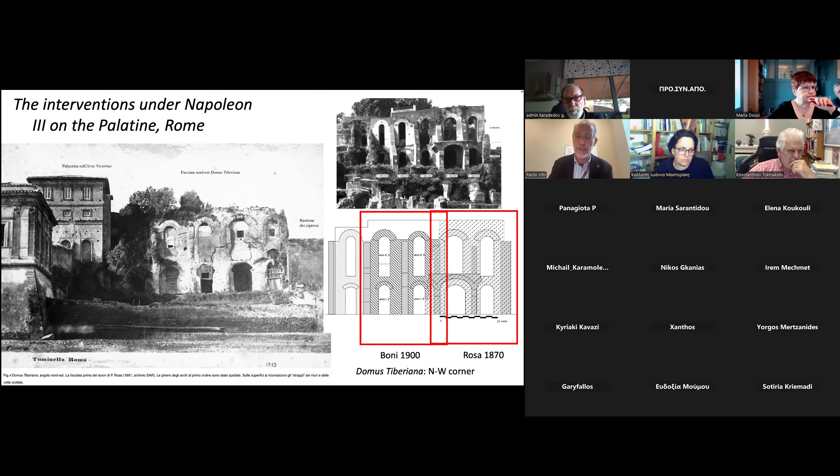This part, in 1860, was bought by Napoleon III, who conducted extensive archaeological research, which caused the condition you see in the image on the left. This is the layout you see today. You understand that the removal of soil caused some very important structural issues. For that reason, in two steps - the first in 1870 by the archaeologist Rosa, and the second by Giacomo Boni in 1900 - they addressed the need to structurally support this very impressive elevation, extremely high, which had structural issues because of the excavations.

The context of archaeological intervention is one you have studied: the principles of conservation established by Giuseppe Valadier, who in 1823-1826 conducted the famous intervention on the Colosseum, made eminently using the traditional building methods of the period. So if you look at the brickwork, you recognize it has nothing to do with the Roman brickwork. The main purpose, aesthetically, was to reestablish the idea of appropriate aesthetics, but through construction methods that were contemporary to the building culture of the time.

If we go look at the Domus Tiberiana and the details of the masonry used to reconstruct, you see these buttresses and vaults that support the facade. In red is this area, which originally corresponded to a barrel vault covering a room that had collapsed. This barrel vault is built through a very traditional brickwork called the Flemish bond - bricks placed like headers and stretchers, which has nothing to do with the section of a collapsed vault. So there is no intent to showcase any philological appropriateness in terms of aesthetics of the restoration corresponding to the aesthetics of the ruin or the construction methods of the Romans.

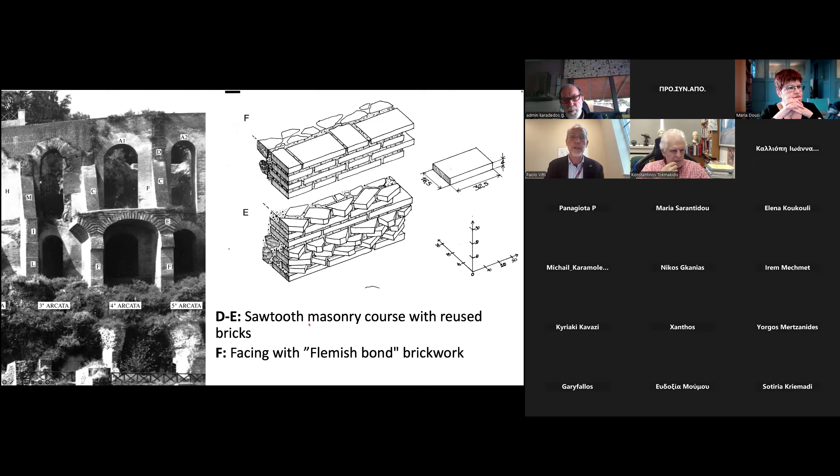This is translated into systems that use the bricks in two ways: one is the Flemish bond, as we discussed, and in some parts, like here, there is an attempt to show the incompleteness of the structure through the use of sawtooth masonry. All this is taken directly from contemporary construction methods. This is the Palace of Justice, a building under construction in the same period, and you see that the construction system is basically the same applied to an archaeological remain.

So we understand that by the 19th century, the appropriateness in intervention was basically to keep structural soundness by using the building methods of the period. But in the early 20th century, there is a shift - moved by archaeologists, there is a higher understanding of visual appropriateness in restorations.

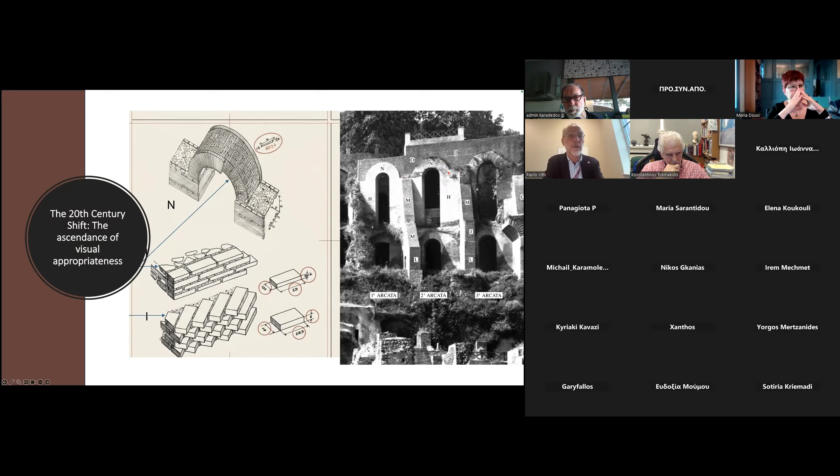This causes the fact that, for instance, the arches that are restored have to look like the Roman arches and how the Roman arches were done.

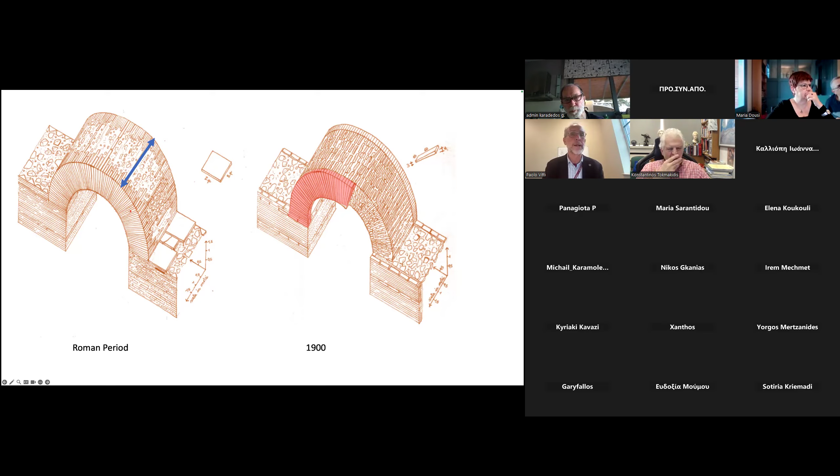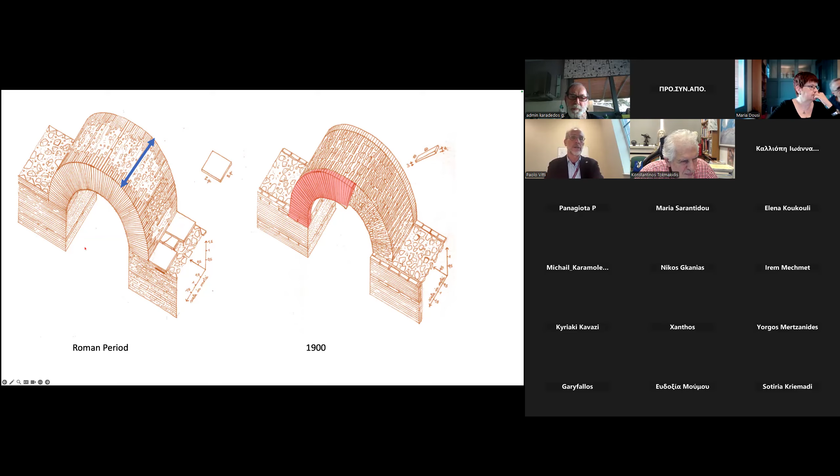You see here on the left side a diagram showing Roman masonry. The thickness of the arch is executed through a mixed structure of bipedalis bricks - big bricks, 2 feet by 2, that is to say 60 centimeters by 60 centimeters. These bricks are cut, and in order to bond together with the core of the arch, which is made with concrete or Roman concrete, that is to say mortar and little stones, they have some courses of the same big bricks that go from side to side, achieving a structure that is eminently sound in terms of load-bearing capacities, as we know very well from Roman construction.

In the restorations of 1900, you see that they used a thinner brick that looks like the Roman arch, but the core of the arch is made with smaller bricks, so that at the end the structure is composed of three distinguished parts. The core, which is made with bricks, has a building method that is completely different from the Roman period, and is applied as a skin against the arch in order to look Roman. From the point of view of structural soundness, this means the load-bearing capacity of the arch is reduced in section because it's not the entire arch, but only a smaller portion.

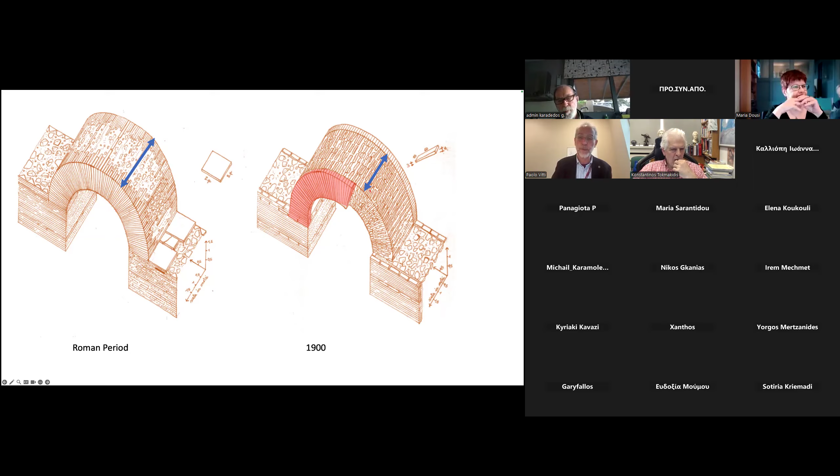One of the most important scholars we have in Italy in the early 20th century is Gustavo Giovannoni. He is an architect, an engineer, a historian of architecture, interested in archaeology, and the founder of the School of Architecture in Rome. He belonged to a series of professionals of that time who would not be confined only to design, but would have a more holistic approach to architecture - what we call the architetto integrale, the integral architect, who discusses tectonics, aesthetics, design, and understands architecture as a whole thing, not distinguished into sectors.

He was very critical of a trend at that time where students were starting to look at buildings in a separate way, as contemporary architecture does, distinguishing between skin and structure. They were looking at the aesthetics without understanding the unity between aesthetical matters and structural matters. This is so important in today's scenario of architecture, because we have seen this shift continue to grow, bringing more and more architects to make designs that are not generated from an understanding of structural matters.

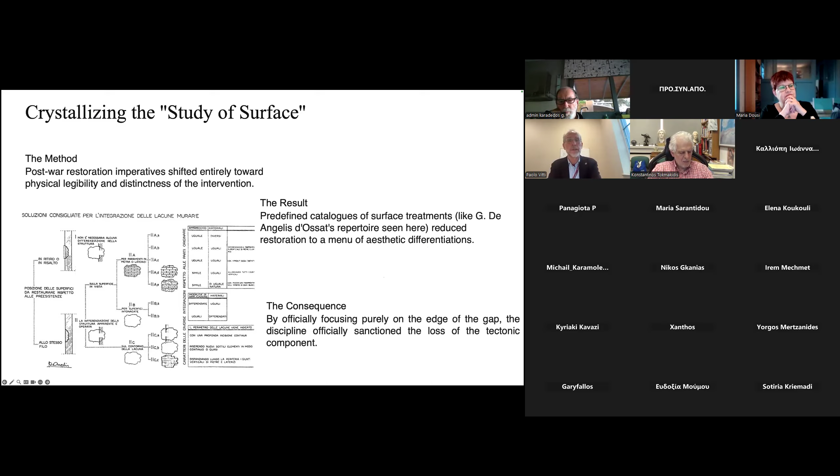The visual impact of this is very strong, but all in all it does not correspond at all to the appropriate reading of the construction method of the original building. It's a scheme that is simply applied onto the Roman wall.

So let's go a little bit more into the theory of Brandi. I suppose in your theory courses you have gone through that. It's a theory that is quite difficult and complicated. Reading the theory of conservation of Cesare Brandi is difficult even for Italians, because his language is very complicated. There are translations in many languages, but while the methodology he's suggesting is very straightforward and strong, the reading of his book is not so straightforward.

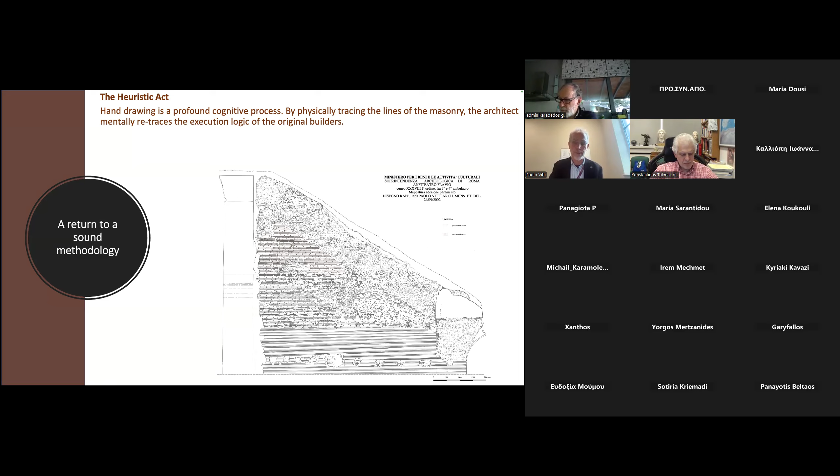What we do with hand drawing is to reconstruct the DNA, the understanding of the archaeological remains, very much according to the principles of building archaeology.

In Italian, archeologia dell'architettura is a holistic method of reading the archaeological or historic structures, so that through the analysis we understand every single element that will make us understand the building as the result of processes that go from the selection of materials to the construction, and to the later history, decay, and eventually ruin.

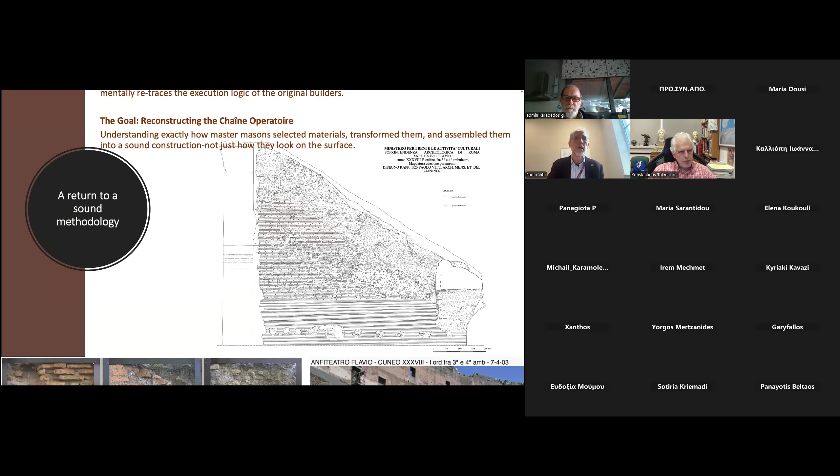In this drawing, there is an acknowledgement of the fact that we have three different levels, and we study these three different levels. You see, A is a decayed facing of bricks. B is a joint between a brick masonry and a part which has only tough bricks.

And the reason is that this line here is the line of the impost of a vault, and here is the building technique of the vault, which is made with these stones placed horizontally.

The result of this is the study. This is in the Colosseum, the result in terms of intervention. So there is an application of the theory of Brandi in terms of making the lacuna feel to be in continuity with the existing part, but at the same time understanding how it can relate to be visually on a second plane.

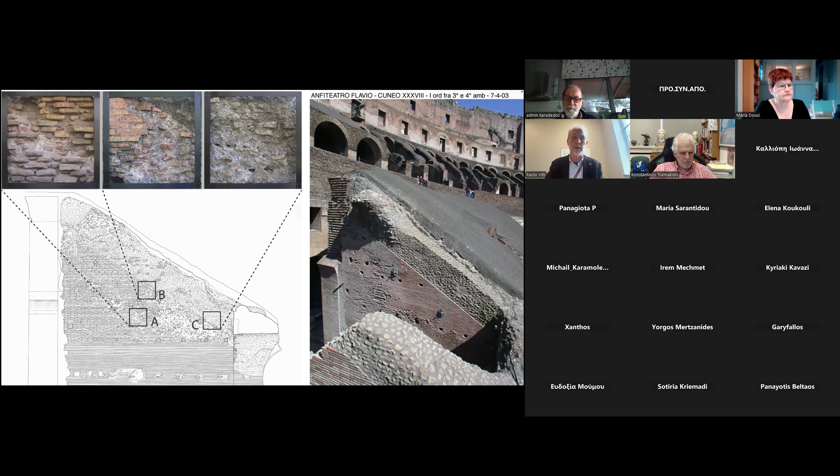Now, I am moving to the end of my presentation. I will dedicate the last part to the methodology we are applying today in our studies on heritage, taking into account the importance of the digital tools that we are using today.

So you know very well today, all my students do that, and I myself do that. We are using the digital tools for documentation, which have extreme precision, and they really solve problems that we had 30 years ago when documenting heritage. So it's a tool that is increasingly important, but at the same time is a tool that needs to be used without losing the contact with the buildings.

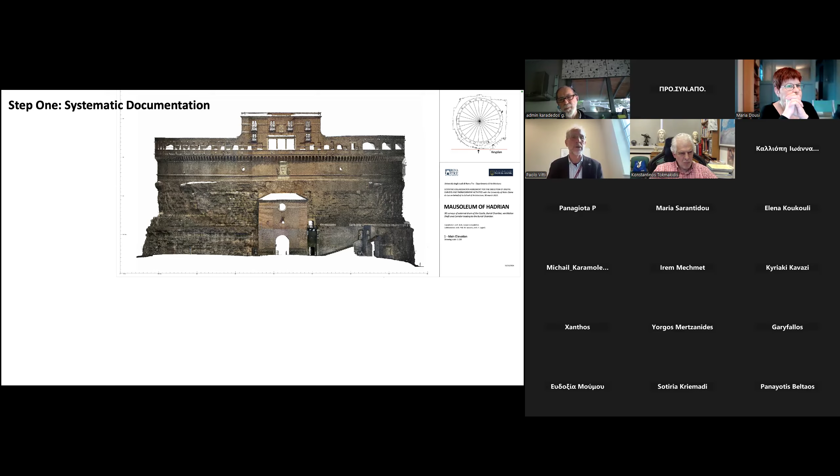I will argue this better by taking another example. This is an example for a fallen masonry in Hadrian's Villa, Villa Adriana, where we have this block. This is the laser scanner made of the block. It's laying on the floor.

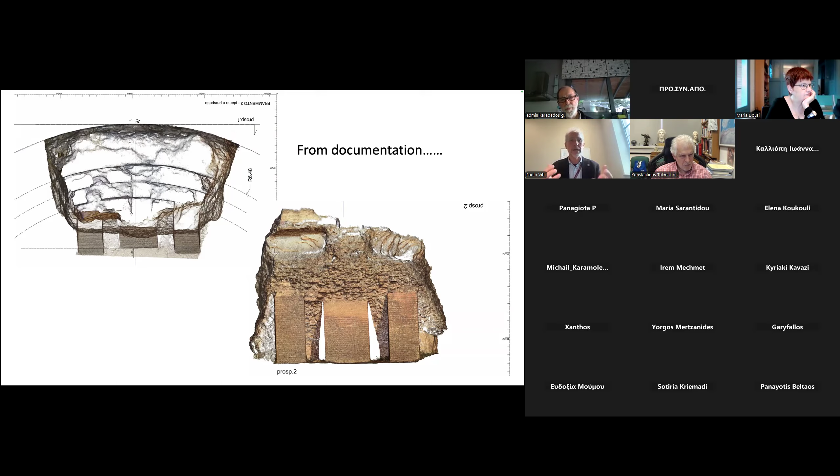From this laser scanner, we extract 2D drawings, which will be used for the analysis on site. So these are the drawings made in the traditional way on that remain. Which is the gain? Well, the gain is the fact that you spend a lot of time to observe and understand a building or a structure or a remain on site.

The digital tools are very quick. We did the laser scanning of the immense city hall of Hermopolis in Syros in 1 day and a half. These are more than 5,000 square meters of building.

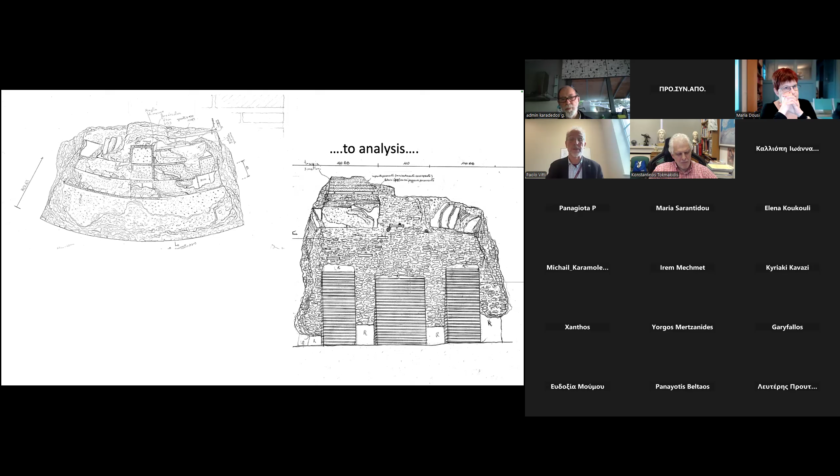But what happens if you don't do then the work on site is that you lose the contact with the structure and the understanding of what we call the chaîne opératoire, the materials, the execution, the understanding of the DNA of a building. And in restoration, because we need to make choices and do transformations on the buildings, the more we understand, the less we intervene and the better we do. So there is a need to spend time on the buildings, not to lose this important component.

So this is what we teach. What we arrive at with interpretation is very interesting. This block looks like whatever. In reality, you see that it has inside brick ribs, and is a unique building, contemporary to the Pantheon.

This is a unique evidence, and as you see, it's a part of the dome, and has this evidence of the stepped extrados. It's the first time that we see some brick ribs placed in that location in that way. No other building in the Roman world has this kind of thing.

What matters is this matters for the history of architecture, for the history of construction, but also for conservation, because sometimes the role of these ribs must be kept into consideration, particularly when we do an intervention. We have to keep very clear this evidence.

So one of the exercises we do with students is that three-step intervention. When you look at a building, you see the building as executed. But every building has what we call the regola dell'arte, the principles of construction, best practice in construction.

If you look here, Roman masonry, you see that these joints are really very irregular, as if the bricks, when cut into triangular shape as the Romans used to do, are placed according to a very regular pattern, as a rectangular brick. But in reality, this does not happen. The execution was made like this.

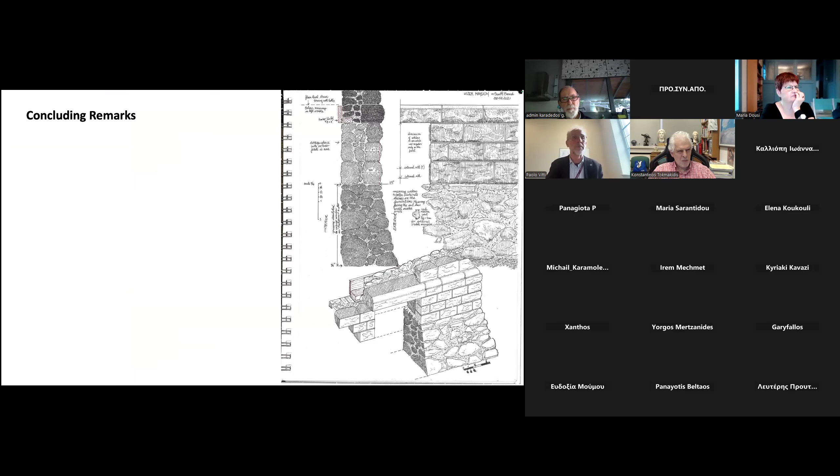So, to conclude, I think that the theory of Brandi, read appropriately, is still extremely powerful and can really suggest ways to tackle the field of the lacuna. The centrality of analysis, study, interpretation is crucial.

In the drawing on the right, this is a sketch. It's not really a survey, it's a sketch made on site, but it's a measured sketch of a building here in Indiana, in South Bend, where the university is. It is a traditional masonry building where there is all the understanding of the different building techniques, the materials that are used, where they are used, and how they are used through on-site work.

So the only way to do appropriate work is to look at the building in a holistic way, both as core and facing, and above all, the centrality of hand drawing in the cognitive process of your work. If you don't do that, you may fall into huge mistakes. Thank you very much.

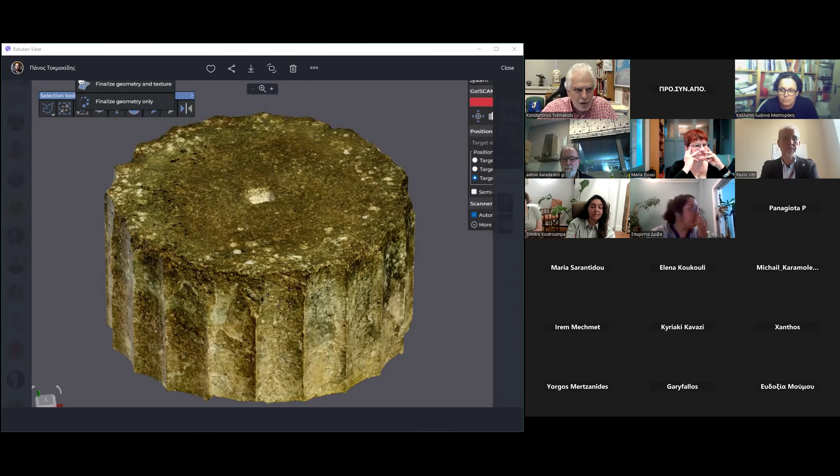Θα τα αποτυπώσουμε τώρα από τις 4 πλευρές που είναι ορατές, και μετά θα πάει γερανός, θα τα γυρίσει ανάποδα και θα ξαναπάμε να τα αποτυπώσουμε και από την ανάποδη, προκειμένου να βρούμε ποιο συνδέεται με τι. Αυτό νομίζω είναι δύσκολο να γίνει με τις κλασικές μεθόδους, που μάλιστα στην αρχή της ομιλίας ο Παύλος είπε ότι κάνανε laser scanner και μετά το χρησιμοποιούσαν για να κάνουν τα σχέδια. Αυτό είναι λογικό, αλλά ακόμα και σε αυτή την περίπτωση μια ορθοεικόνα, μια ορθή προβολή της αποτύπωσης με το σκάνερ, μπορεί να δώσει πολλές πληροφορίες.

Αυτά από μένα. Ναι, δεν αμφιβάλλω, είναι όπως το λέτε εσείς, και βέβαια με ένα κομμάτι από κίονα είναι πιο εύκολο, αλλά άμα δουλέψεις πάνω σε μία δομή μεσαιωνική, ρωμαϊκή, που έχει φάσεις και πράγματα, αν δεν είσαι επιτόπου δεν μπορείς να καταλάβεις τίποτα από τις φάσεις, από τις δομές, από τα κονιάματα, και έχω δει σχέδια που δεν λένε τίποτα. Το σημαντικό είναι πόσο εμείς θα καταφέρουμε να κάνουμε έρευνα πάνω στο digital, γιατί σε πολλές περιπτώσεις χρειάζεται να δουλέψει κανείς επιτόπου.